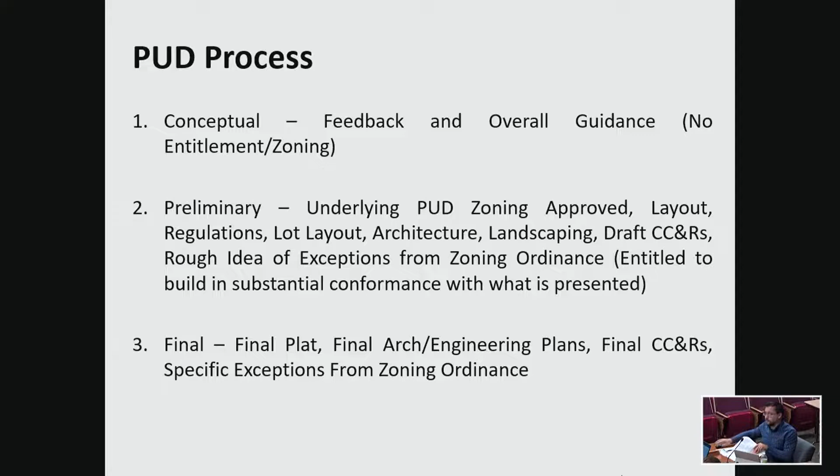The zoning for this is currently B3, and it's part of the Brookside Glen PUD. The property to the west is zoned R6, medium density residential, and that's the multifamily development under construction with the foundation, called Magnuson.

To the east, across 80th Avenue, is undeveloped B3 property, similar to this project, and then there's R6 and R5 residential districts surrounding that. To the north is an undeveloped, unincorporated parcel zoned C6, a general commercial zoning district under Will County. And to the northeast is a vacant lot zoned ORI, kind of the area in front of the Panduit headquarters building.

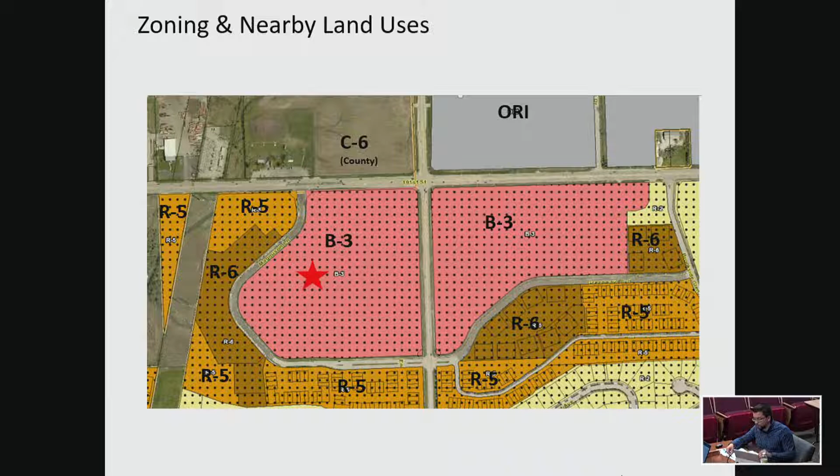The parcel is also located in the Urban Design Overlay District, which is more of an urbanized, denser, walkable development—things like putting buildings towards frontages, parking in the back, sidewalks, less curb cuts. But that only applies to commercial development. So what they're proposing today is really only preliminary on the residential portion of this. They're going to leave some commercial there that's a little more manageable for them to market, but that'll stay at the conceptual level. So that would come back for preliminary approval when they have a developer or businesses to go into that.

I won't go into all the history of this PUD because it's pretty detailed in the staff report, and I'll thank Paula for doing the legwork on that the first time around. This has really kind of transitioned—it's been amended quite a few times, and that's typical of a planned unit development of this size. It has some ebb and flow with the market demands and what's working, what's selling, what isn't, what the village wants, what the developer wants. So it's been amended a few times.

This area was originally a bit larger commercial than even what's out there today. Where you see the Magnuson Apartments and the townhomes to the south of this development, that was rezoned with a PUD approval to allow that to be residential, leaving the commercial that's out there today. So this will take one more chunk and make it residential as well. But it was a little larger traditional shopping center with big box retailers—Walmarts, Targets, Home Depots.

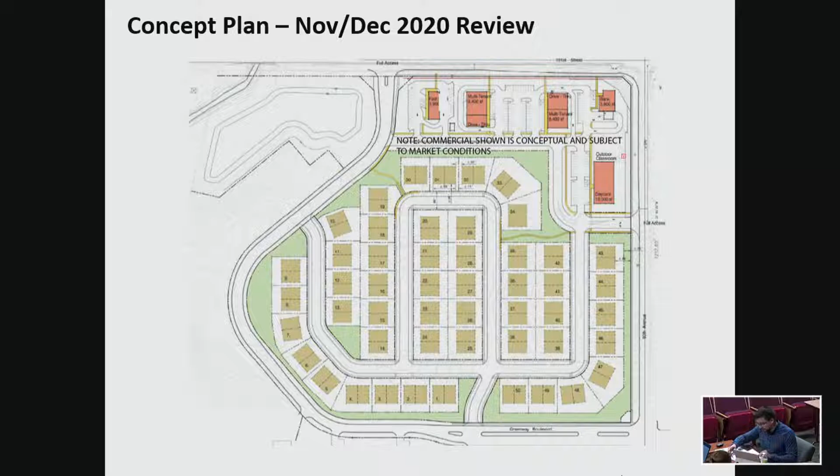So here is the preliminary plan that's before you guys again today, with a few minor changes and a little more detail in terms of the landscaping details, signage details, and options for the building, all in your packet. I'll go through some of those, but it is a pretty intensive list of everything they submitted for this packet. So that's in the packet that you guys got. The landscaping here—let me go back to this.

So this concept plan is again just a preliminary proposal for 49 duplex buildings, 98 units. They're looking to take this lot and move it from 100% commercial to about 23% commercial, with 77% of it becoming residential. So they would be looking for a rezoning here before you guys, and then with approval of the village board, to rezone this portion of the lot to R5, which would allow for the duplex units.

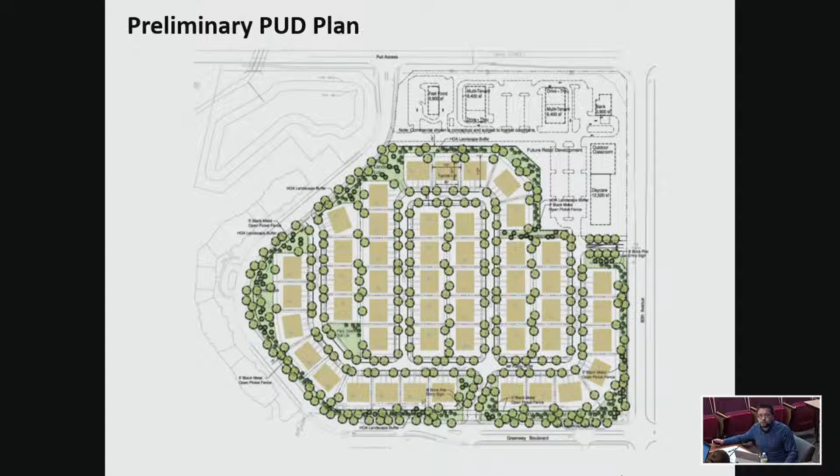You guys have had exceptions come before you previously for things like signage, or if somebody is looking to do landscape changes that don't meet the code—that's considered an exception, similar to a variation, but you look at it more in terms of how it fits the PUD and the overall development goals. With preliminary approval, we try to call out as many as we can see; it'll really be the final approval that outlines what you're allowed to do outside of the code. Throughout this I've listed generally what they'd be deficient at, what they're asking for, and anything unique or different from what the zoning code would allow, just to give you guys an idea of whether this fits generally what we've approved before for this type of development.

Landscaping—a landscape buffer is proposed around the entire perimeter, with the overall layout being internal to the roads that surround it. So you have 80th Avenue to the east, Magnuson Lane to the west, and Greenway Boulevard to the south. Everything's been planned to be a little internal, knowing this is a residential community—we didn't want any of these fronting onto those major roads. So the outside has a pretty substantial buffer there.

The buffer ranges from about 15 to 30 feet throughout, and then there are additional setbacks for the units from that buffer yard. So if you have a duplex unit, it's an additional 30 feet you usually have. So you have at least 45 to 60 feet between the roadway or right-of-way and where there would be a house.

Compared to the concept plan, this is a little more detailed. They've added some additional landscaping to bring this closer into conformance with our landscape code. The landscape code can be fairly difficult to meet sometimes, and it sometimes goes a little beyond what some of these can support.

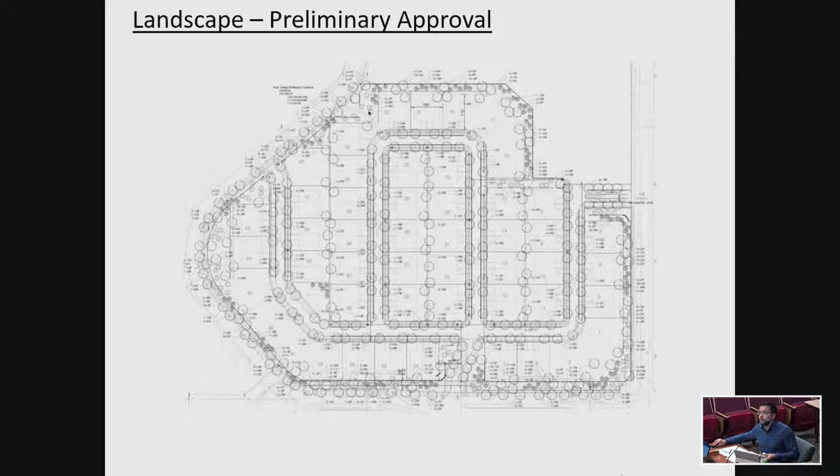Fencing is kind of a big part of this because it surrounds the majority of this development. They have that wrought iron style, but it's aluminum black fence that surrounds the overall development. With staff's recommendation, we did request that the north side of this, which would front the future commercial, actually use a privacy style fence. If you look at the overall concept plan, you'll see you could have headlights or cars facing that, and there's kind of a main roadway connection point on that.

For the time being, when nothing's there, it may look a little odd because you're going to have a fence that's most visible from 191st Street. But we think when this overall development gets completed, that will be the best solution, because you're going to have backyards of these duplexes backing up to what could be some type of commercial, and that'll help buffer any type of noise or headlights beyond just the buffer yard as well. So they have the buffer yard, they have interior lot landscaping on each lot as well, then you'll have the fence, really making sure there's some good separation there.

Coming out of the concept discussion from both the Plan Commission and the Village Board was to work on getting a tot lot park placed in here.

The home types here are kind of one-story duplex. It's age targeted, I think is the term. It won't be age restricted at all, so anybody can move into these. But they really have a mindset of maybe empty nesters, older clients, seniors that are looking for something like this, someone with health problems. But it can be anybody - it can be younger families, and maybe this is their starter home.

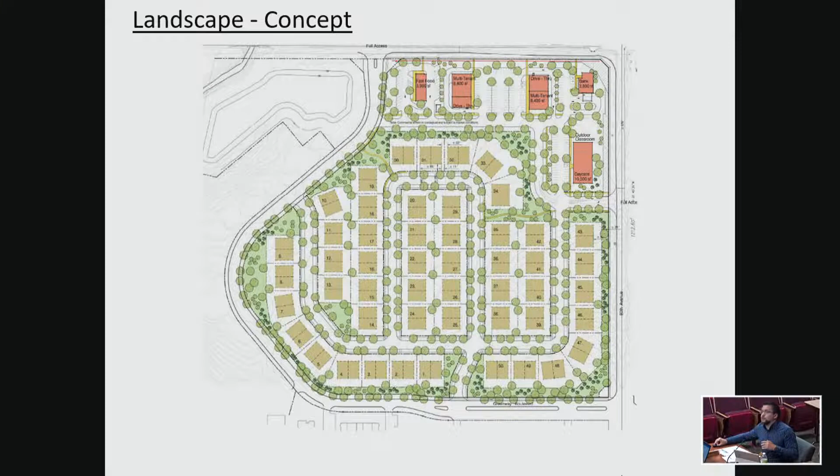Architecturally, the site's got quite a few options. They have three overall types, or designs, or models, and those can all be mixed or matched. In the packet, they have A, B, and C, so you can have A and B together, A and C, or B and C, and those can be flip-flopped in any way.

Within that, they have different options, different roof options, parapets, wall and brick colors. We have some of the materials here, some of the colors here, and there's an overall option chart in the staff report as well for all the materials that are there.

The goal here is with almost any duplexes or townhomes, you do get some that look generally the same. It's a little different than detached single family, where you maybe really do get different architecture. Typically a townhome or duplex will look similar, but the goal here is not to have them all be exactly the same. So you'll get different colors, some will have stone, some different colored bricks, different roof lines, and different overall setups — similar, but the goal was really to give it a varying streetscape.

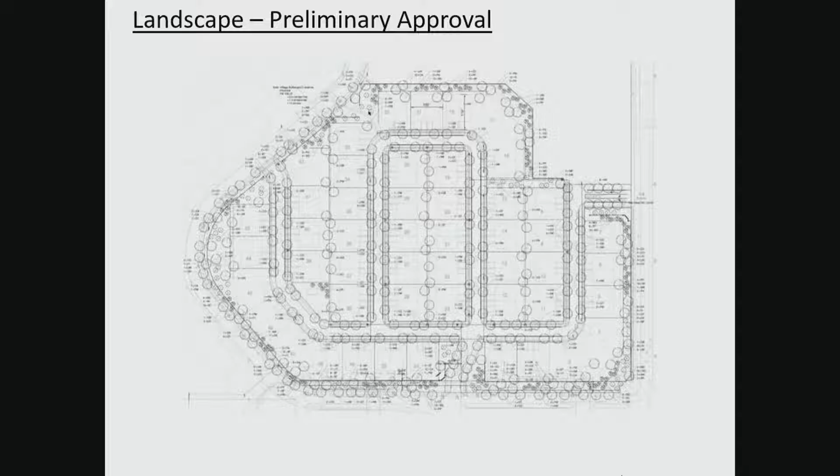The overall design of the subdivision is a little bit circular with some curved streets, so you don't even get too many locations where there are multiple homes stacked. There's one block near the center where you get 6, and on the west side you get 6 as well — sorry, 5. So the most you get in a row is 6 buildings, or 5, and in the outer ring it's a smaller amount. The goal was to create a nice streetscape through this new subdivision.

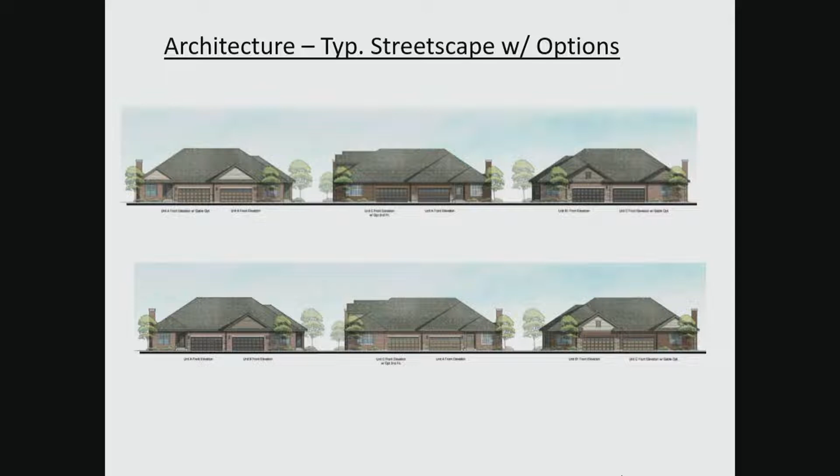This meets our masonry and exterior requirements for materials, which is first floor brick on all 4 sides. You can substitute stone for up to 15% of that, so they've done that here, bringing in some stone while carrying brick around the first floor. The parapet or roof areas are Hardie board, a quality material over, say, vinyl or aluminum siding. So they've kept pretty high quality materials here, in a fairly traditional design, which is kind of what Crana Homes has done over the years, matching what's out there in Brookside Glen now.

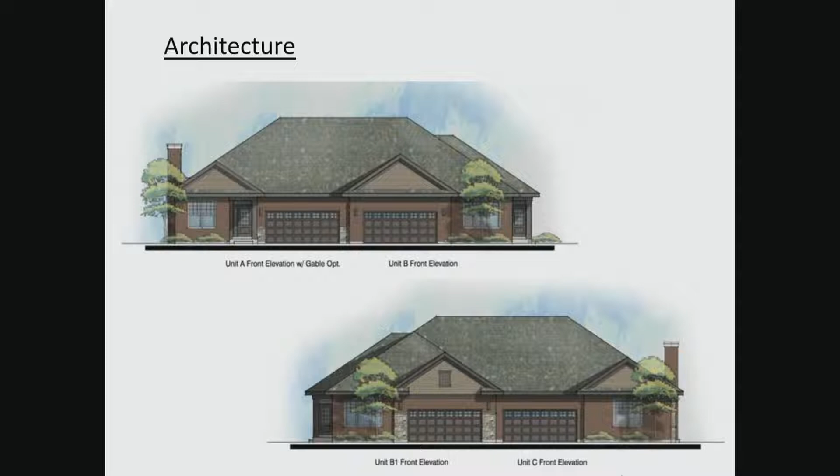Signage: there are 2 subdivision signs that'll be part of this that comply with our standards. Those designs are a little different but tie into the bigger Brookside Glen signs throughout the subdivision. There are 2 of those signs at the entrance to Greenway near this — one along Greenway where you actually enter the site, and one along 80th Avenue where there's the other access point.

So there are 2 plats that'll be before you guys for approval. The first is so they can rezone this, because it's one lot with one zoning district, and they're looking to now have 2 separate zoning districts. They need to formally subdivide it into those 2 lots, since you can't have dual zoning districts on a single lot. This will divide it between the 2 areas you've seen in the concept plans, and now in the preliminary plan, with lot 1 becoming R5 zoning and lot 2 remaining B3 zoning.

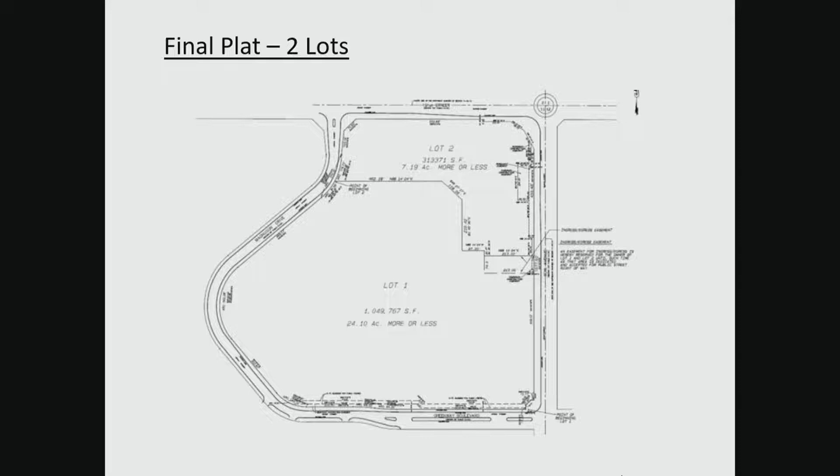The other plat will be a final plat, which would formally subdivide those. The second plat is called a preliminary plat, which really lays out the basic framework for this.

Sometimes the dimensions can change slightly depending on how engineering is, as well as where easements would go. So you're typically going to have all of your utility easements, drainage easements, everything like that on the final plat of subdivision. But they haven't quite gotten to that point.

Final engineering to that level takes a lot of time and a lot of money. So that's why these are broken up between preliminary and final, as it helps them build towards having some certainty that the money they're spending, they're going to get back. So the thought is it will be very close to this, but then they'll be back before you for final approval for the plat and the final PUD documents, and that's when this will be memorialized.

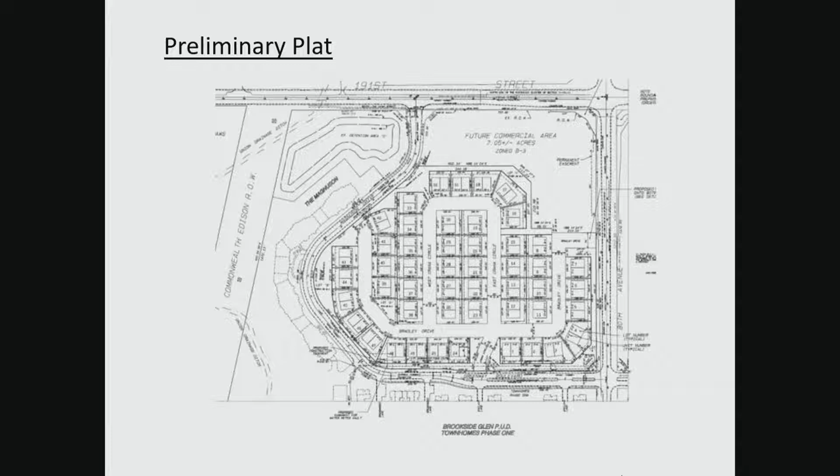The one thing I forgot to mention is also they're called CC&Rs, which are covenants, conditions, and restrictions. So basically the rules of the association. They have a draft of some draft CC&Rs. The final ones would come before you guys with the final approval.

So those are in there, just kind of regulate things like what you can do with your house. Those become part of the PUD documents as well. So for these, you can't have accessory structures, for example. They can't have sheds. The final one is part of the PUD.

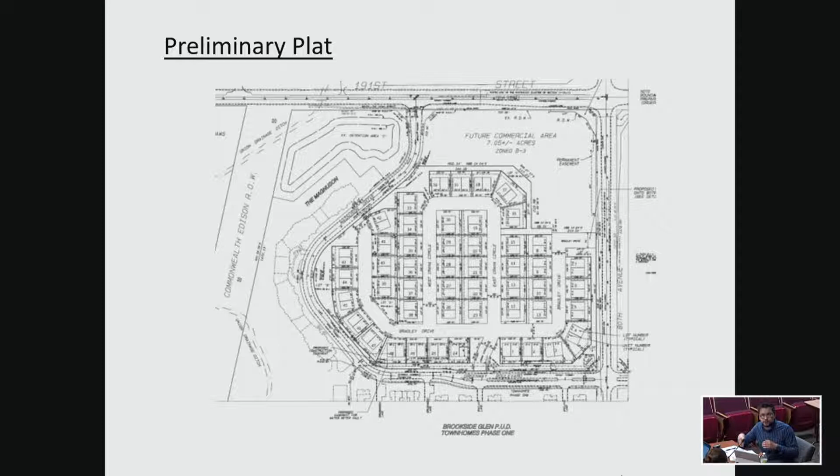So normally an HOA can change the rules, and they still can. But anything that is part of those covenants that come before you for the PUD will actually be part of the PUD document. And so they can't become less restrictive unless they were going to come for a deviation.

So if it was minor, we have some rules and definitions of what's a minor deviation. They can potentially just go through, like if they were changing colors that they wanted on the building. And they wanted to change it to a taupe and not a red, or do something different with the mailboxes. They could potentially do that as a minor deviation.

If it was anything major, like building additions, accessory structures, single-family homes, changing the intent of this development, it would come back before you guys.

So I will stop talking now. The standards are in here as well for the special use, site plan approvals, architectural approvals, rezoning.